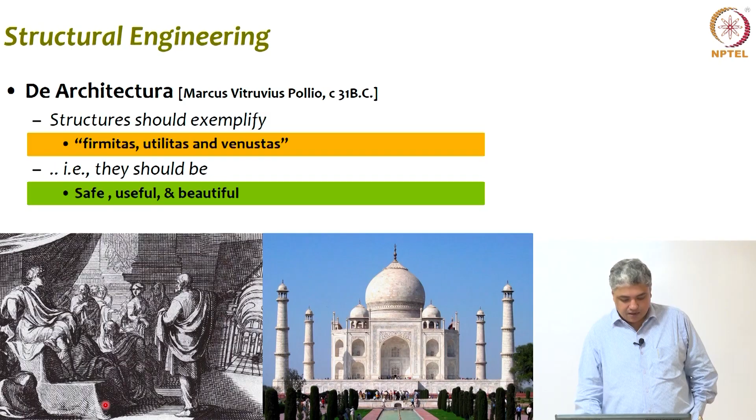Analysis and design, so we have to build structures which are safe, useful, beautiful. This is what was told to us thousands of years back, but the question is, what is safety and how do you ensure safety? We have seen photographs of structures, buildings, bridges that have fallen down, and that is not safety.

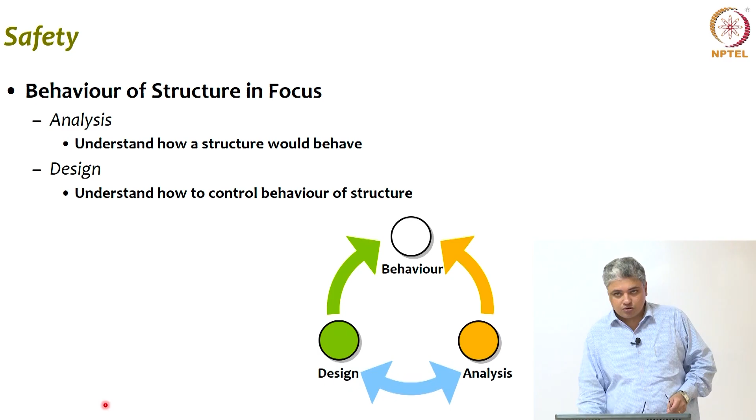So how do you ensure safety? This is where two important tasks need to be carried out by an engineer, particularly a structural engineer, which are analysis and design. What is analysis? It is to understand how a structure is going to behave. And design is to understand and control that behavior, so that the behavior should be acceptable. That is what you ensure through design, and we will see a little more.

Just to give you an example, all of you have seen simple buildings being constructed wherever you have lived and grown up. These are nice buildings with columns, beams and slabs, what we saw a couple of slides back. The analysis and design is often done only for the frames, that is the columns, beams and so on. But suddenly when we construct, we put in these infill walls, the brick walls that you see.

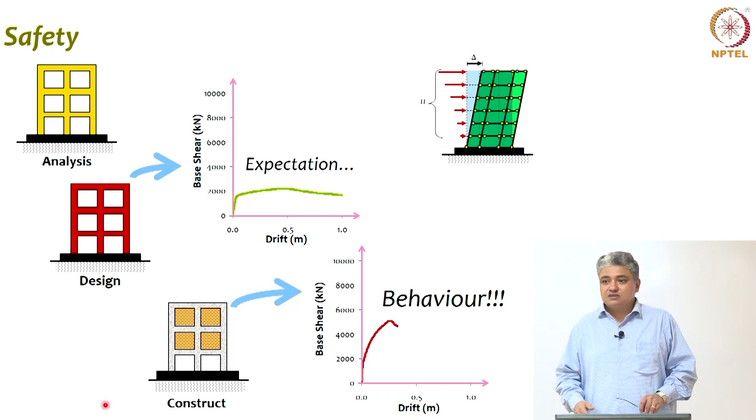So what that does to the structure is, it changes the structure and it changes its behavior. So what you expect while you analyze and design the structure is not what you get after the structure is constructed, and that is not acceptable.

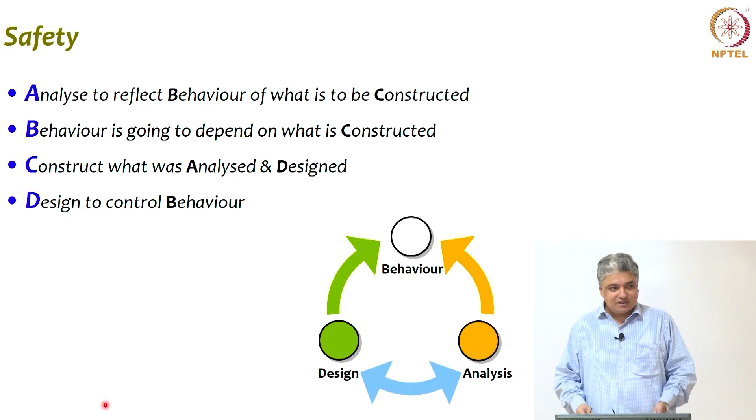This is what I call ABCD of engineering, or ABCD of structural engineering. You need to analyze to reflect - the purpose of analysis is to understand and reflect the behavior of the structure you are going to construct, and behavior is going to depend on what you construct. So you are supposed to construct only what you have analyzed and designed for, and essentially through design you control the behavior of the structure so that the behavior is acceptable. This process is very important, and it's an iterative process that you have to undertake to ensure safety.

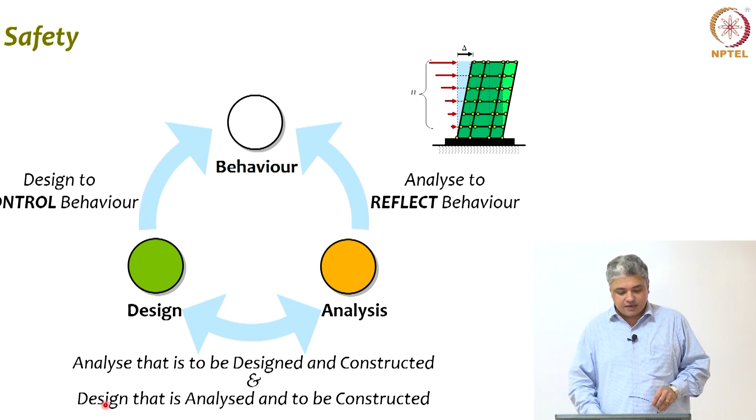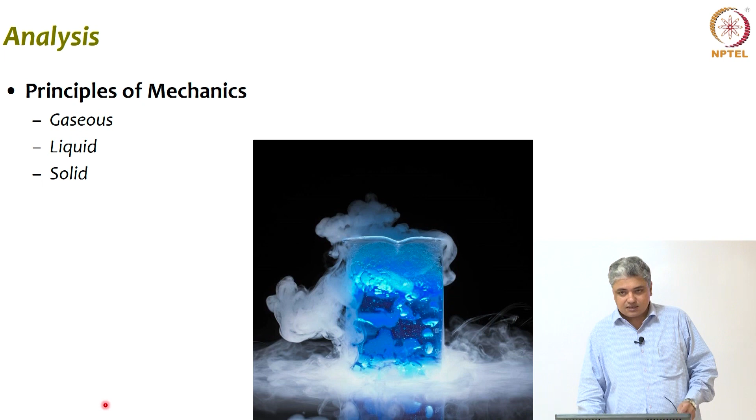In this process, when you talk about analysis and design, how do you do that? Obviously, we use principles of mechanics, and there are a whole lot of courses you are going to take to understand each one of these. We have mechanics for gases, liquids and solids, and to a large extent in structural engineering we use solid mechanics and structural mechanics to undertake analysis and to control behavior through design. The fundamentals, the three pillars, are equilibrium of forces or stresses, compatibility of deformations or strains, and of course constitutive laws, which is how materials behave.

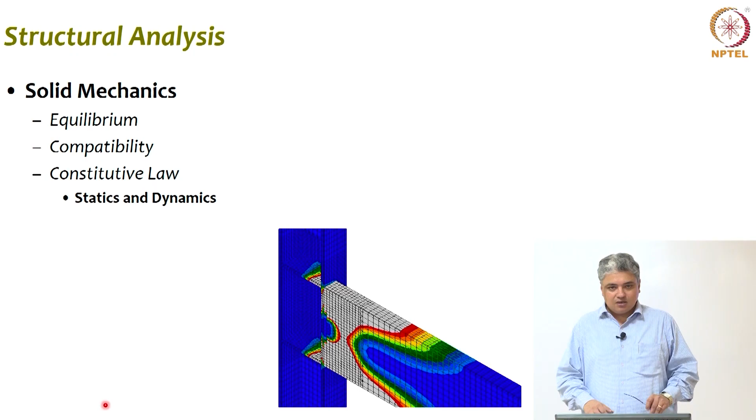And behavior is not just for the given loads, but behavior under static and dynamic conditions. What are these? We saw the stress strain curve for any general material - the deformations or strains can be small or they can be large. When we saw the stress strain curve of mild steel, it was more or less linear up to a certain extent, and then it became non-linear. So it remains elastic up to a certain limit, or it can be inelastic.

Statics is where you have a load applied on the structure in a steady way. For instance, this table is carrying the load of this monitor and the computer, and it's sitting there, not changing. But sometimes you have loads which vary with time, and that induces additional response in the structure which is time dependent - those kinds of situations are known as dynamic situations.

For instance, you have a very slender chimney and wind blowing past it - you will suddenly see the chimney swaying back and forth, that is a kind of dynamic response. Similarly, you will see videos of buildings shaking during earthquakes - that's another example of dynamics. So when you do analysis and design, there are many considerations that you will have to learn and understand how to use, and only then will you be able to understand and capture how structures are going to behave, and that is part of your curriculum here. So you are going to learn that.

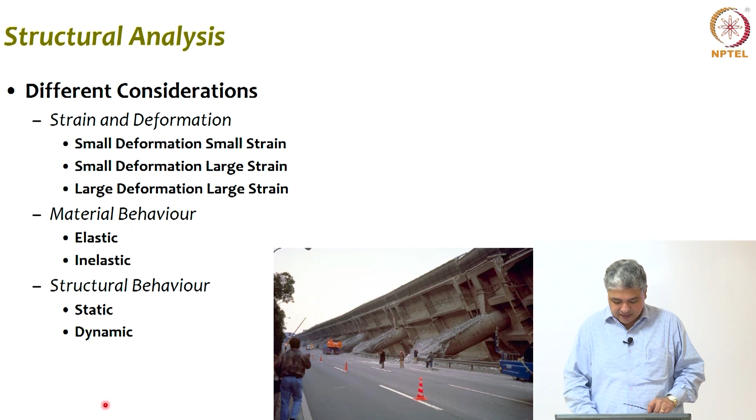Coming to design, there are a lot of ways design can be defined, but I find this particular definition extremely elaborate and very well written. It says it's a mixture of art and science, combining the experienced engineer's intuitive feeling for the behavior of a structure with a sound knowledge of the principles of statics, dynamics, mechanics of materials, structural analysis to produce a safe economical structure which will serve its intended purpose.

It's pretty elaborate, it talks about everything, but most surprisingly it starts with this phrase, it's a mixture of art and science. This is what I have been trying to impress upon you, that structural engineering is not just dry engineering, it's about arts, it's about creativity and so on.

Experienced engineer's intuitive feeling - how do you become an experienced engineer? How do you become experienced in anything? Only by practice, there is no shortcut to this. You want to be a good singer, you have to practice every morning. You want to be a good football player, you have to practice. So to be a good engineer, you have to practice what you are being taught in every class. Please take it, there is no shortcut. You have to work hard, work sincerely, work diligently, and you will be successful in your life. But for that you have to put in that effort. That is the first thing.

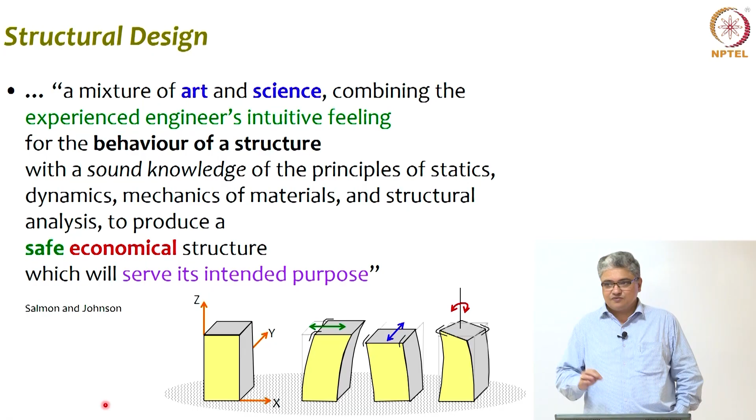But the other important words are safe economical structure. Safety is of paramount importance. You can't compromise on safety just for the sake of economy - that is another point I want to make. And the structure of course has to serve its intended purpose, and we always build a structure with a purpose.

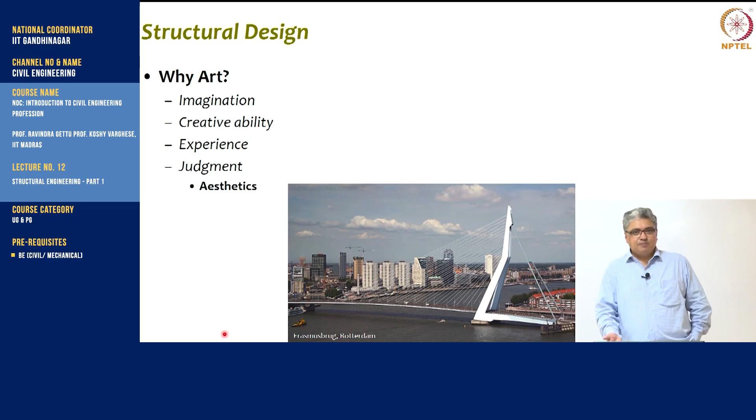That is what we started our whole discussion about. It is simple - we had to build a bridge over this river, and looking at the skyline of the city, they decided to build a bridge which looks like a beautiful swan springing up from the river. It serves the purpose, but they add creativity to it, and that is what is possible in structural engineering.

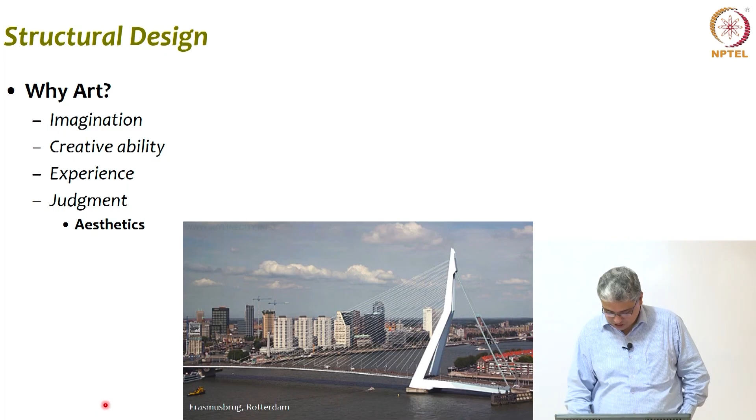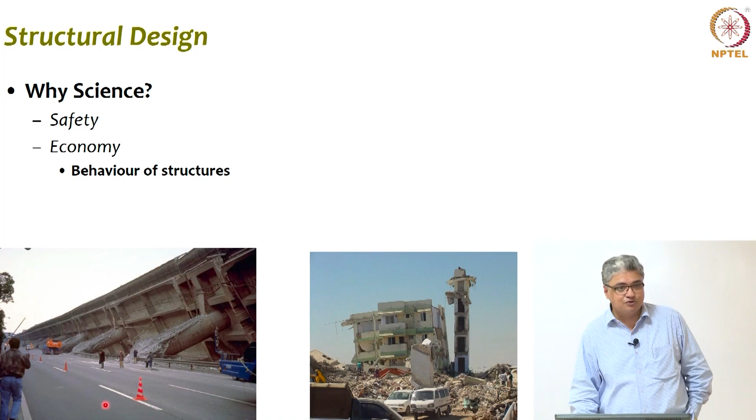Science - you have to really understand what is going on inside, because if you do not, your structures will surprise you in a very bad way. So that is why they say structural design.

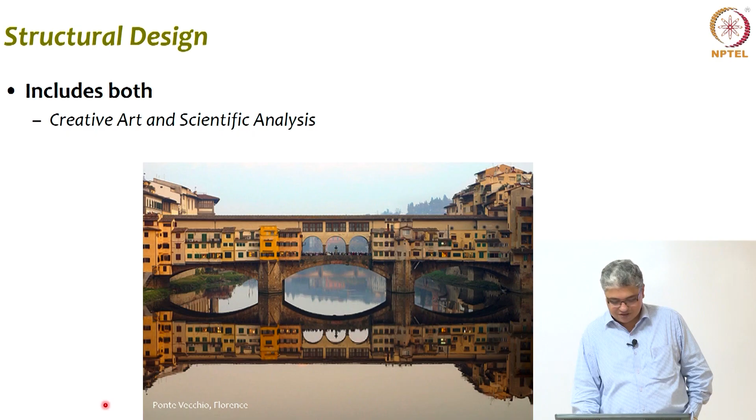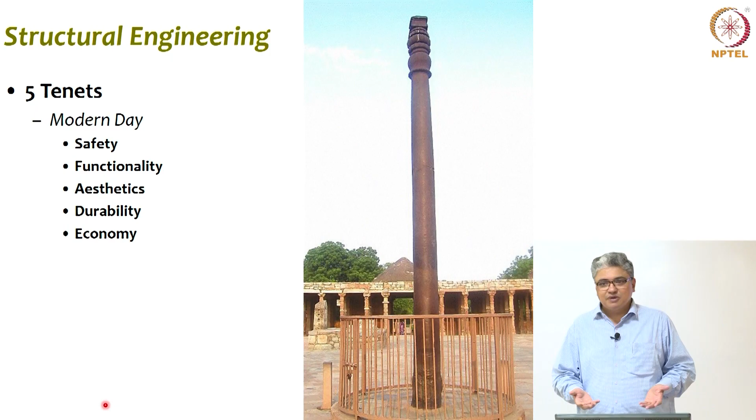This was a simple bridge, and they kept on adding things over and above that, and then finally look at this beautiful structure that you have. That is why we said on the first day that the 5 tenets of structural engineering are not just safety, functionality and aesthetics, but also durability and economy. You can't - if I want a small shelter, I will not go and build a pyramid today with a small chamber in it. It has to be fast, it has to be durable, it has to be economic also, in addition to being safe and functionally correct.

So what are the things that a structural engineer has to do? Very quickly - I am sure there are other occasions where you have been told about how a civil engineering project goes, but the basic components, if I look at it, there is a design process, there is administrative work including contracting and so on and so forth, and then the structure has to be constructed, or the system has to be constructed.

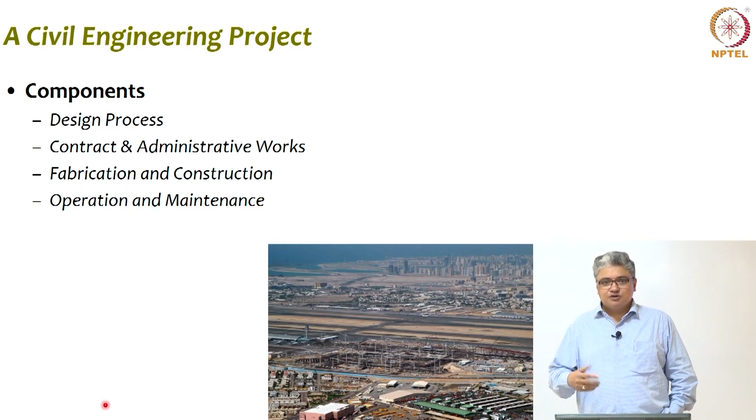So there's fabrication and construction, but there is one more important thing which we often miss, which is operation and maintenance. And maintenance - we are very bad at maintenance, trust me, we have to develop that culture also. We build a lot of good structures, and then we think once it is done, our job is over. Our job is not over, we have to continue to monitor it and do maintenance and operation.

Very quickly, this whole design process actually has two major parts. One is the functional design, and this is where the whole feasibility study is done. Today you will hear a lot of these - feasibility study is an important aspect.

You need to get so many clearances and so on and so forth. But one of the important parts of that whole study is what kind of structure to build. I need to build a bridge - what kind of a bridge? Of what material? Of what system? I need to build a building - what kind of building? What structural system do I use? What material do I use? So all these decisions have to happen here.

They often say that if you do not put in enough thought into this process, then by the time you start executing the project, you will find that there are a lot of difficulties. So this is an important step, and this is where a lot of players come into the picture. You will have the owner, the planner or architect, other engineers, government bodies, and also the structural engineer and the civil engineer.

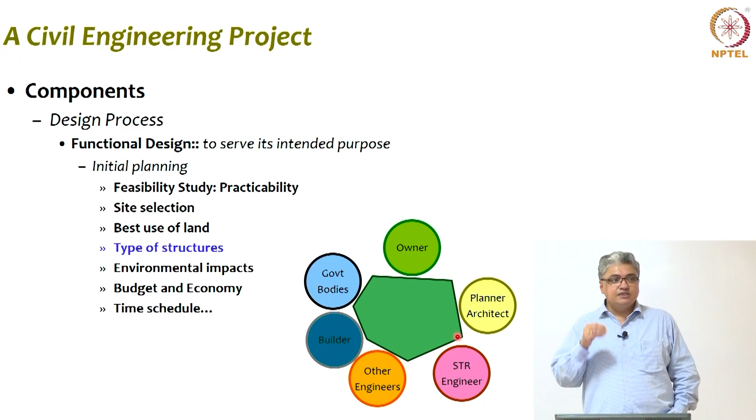He or she has to start participating from this stage. It's not that we let everyone else do everything and we come at the end, because your input is also very, very critical in shaping the project in the first place.

And then once that is done, you will have the structural design, and that's also not a one-step process. It's an iterative process where you first do a preliminary design, understand systems and so on, and then an important task is cost comparison, because you have to do it in an economic way. This is where the structural engineer comes in and plays a very crucial role.

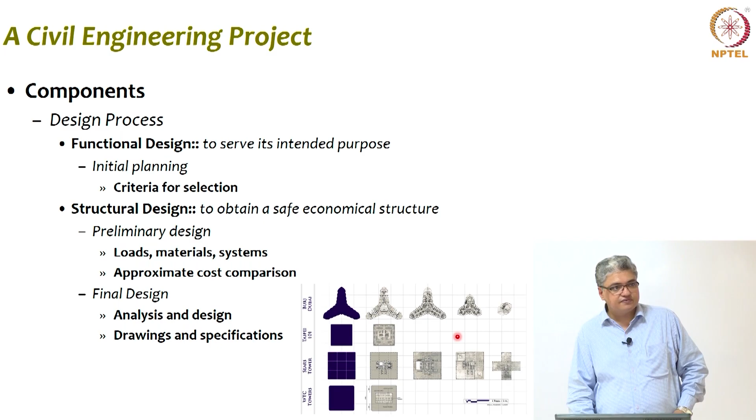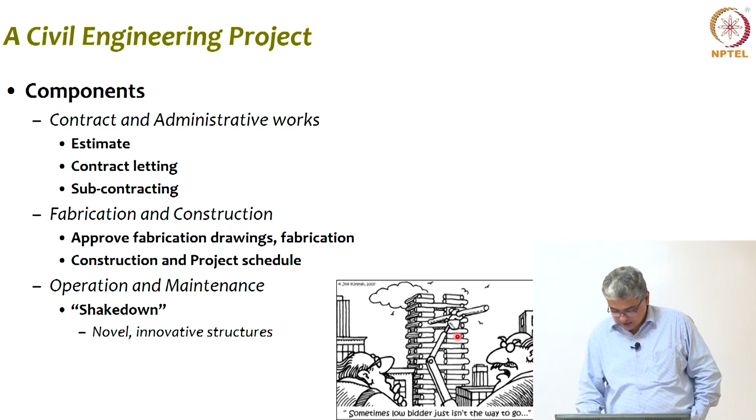Finally, once everything is frozen, you go and do your final analysis, and then finally drawings and specifications. That's not all - in the administrative work also, contracting, estimation and approving of fabrication drawings, actually supervising construction, everything is an important activity where a structural engineer has to play a role, including operation and maintenance and so on.

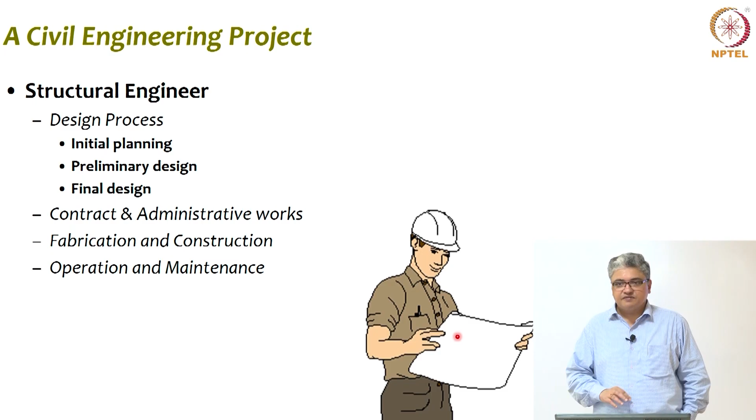So a structural engineer takes part in each and every activity that you see in a whole civil engineering project. Therefore, the responsibilities are very high for a structural engineer or civil engineer, so to speak. First of all, you have to be technically competent - you have to know what you are doing.

This is true for any trade you take. At the same time, you need to develop administrative skills also, because it's not just you - one man cannot build a whole project, such a big project. So you have to work with people and manage people also. You have to understand the economics of the project, interact with people, and understand social aspirations - what the community wants from you - and so on.

There's a whole lot of responsibilities and duties that a structural engineer has to play in the successful completion of a project. So you have to develop and inculcate all these qualities in you if you want to be a successful engineer, a successful structural engineer.

And if you manage to get all these qualities, it's needless to say that often you will find yourself being the team leader of such a big project, because a team leader is one who understands each one of these items and has the capabilities to handle each one of them.

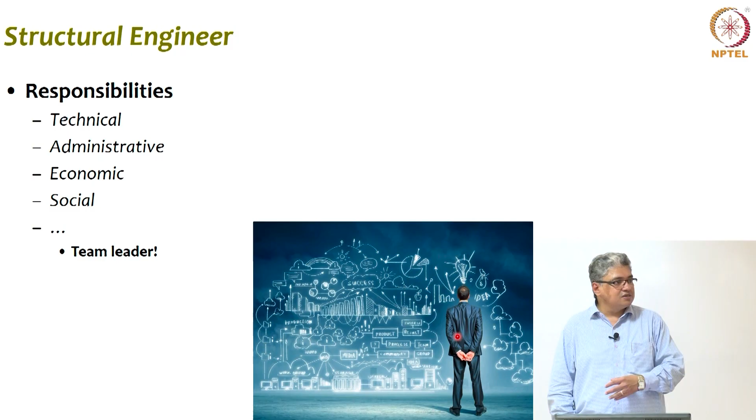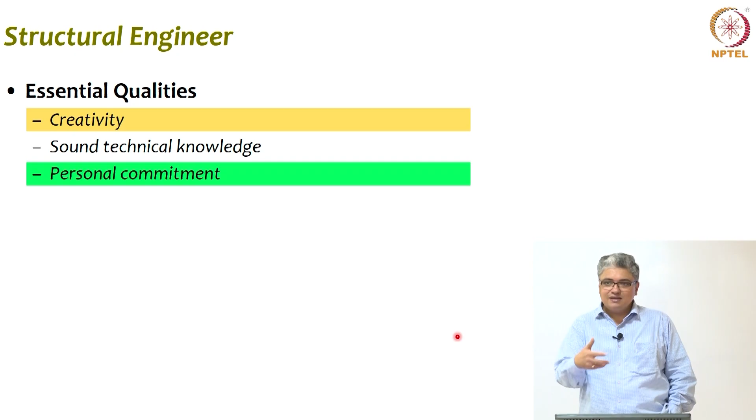So that's very important, and that's why I say you have to be open to ideas and have new ideas. Don't be scared to try new things. We saw the mixing and matching of different systems, different materials - somebody had to take that call someday, that okay, let's do it this way. People have done this, can we mix both of them together? That's creativity, along with sound technical knowledge and personal commitment.

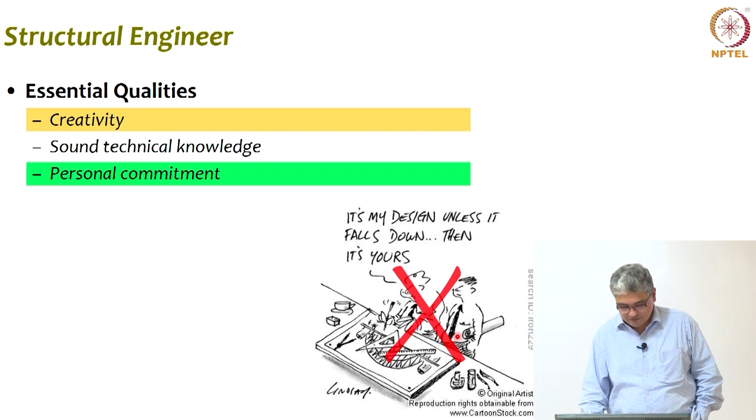I like this cartoon and I show it, but just to say this does not reflect a good professional engineer. This is not the right thing to do, and we will not do it. We will take responsibility for our actions, we will be committed to our work, and we will do good work. That's the commitment that all of us will make towards ourselves.